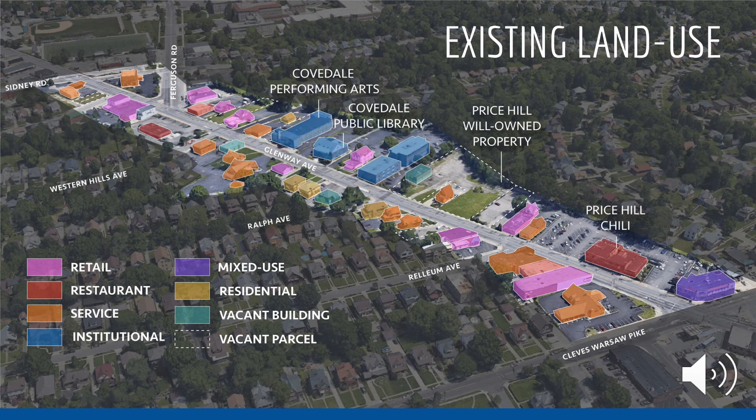The farther one travels west away from Cincinnati on Glenway, the more auto-oriented the urban environment becomes. The automobile has dramatically impacted Glenway's form and function.

The over-reliance on cars has negatively impacted neighborhood business districts in three ways. They have decreased the walkability of urban commercial corridors, resulting in fewer pedestrians and less time for passersby to take notice of their surroundings. Furthermore, pedestrians are currently forced to walk alongside the busy thoroughfare, making it dangerous and decreasing the total number of pedestrians walking throughout the district.

Second, they have greedily consumed the majority of the right-of-way to cars, seen in the 4 lanes of traffic currently allowed for vehicles, making alternate modes of transportation non-existent.

Finally, parking has been so prioritized that it has manifested into front parking lots, creating a physical barrier between pedestrians on the sidewalk and the buildings.

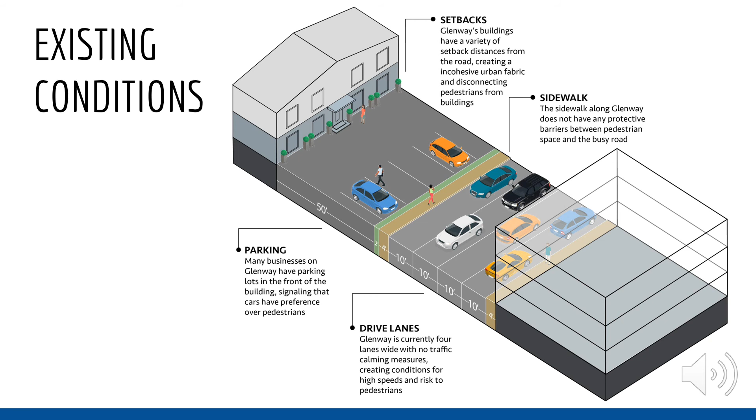The nature of how we produce and consume is changing, and therefore the nature of work is beginning to evolve as well. Retail storefronts have been declining since the Great Recession, and Cincinnati's neighborhood business districts, including those in Price Hill, have experienced this firsthand.

The fallout has resulted in an onslaught of lifeless streets and vacant storefronts. The overprescription of retail as the predominant use for commercial areas has led districts like Glenway into an unsustainable cycle that negatively affects the greater community's quality of life, efficacy, and self-esteem.

Therefore, exploring how non-retail uses can spur neighborhood vibrancy and activity must be explored in order to set neighborhood business districts up for success in the future.

A healthy street is one where there is trust between buildings, users, and pedestrians. Active storefronts can help sidewalks build trust, build life, and build community. But the question is, if you're not buying and selling in a storefront, what can it be used for?

First, storefronts can act as community spaces where people can gather and interact. Second, storefronts can become a place for creation instead of consumption. Third, storefronts can still be places where people look, watch, and explore. And finally, storefronts can change. Sometimes the best use for a community requires the creation of a new space.

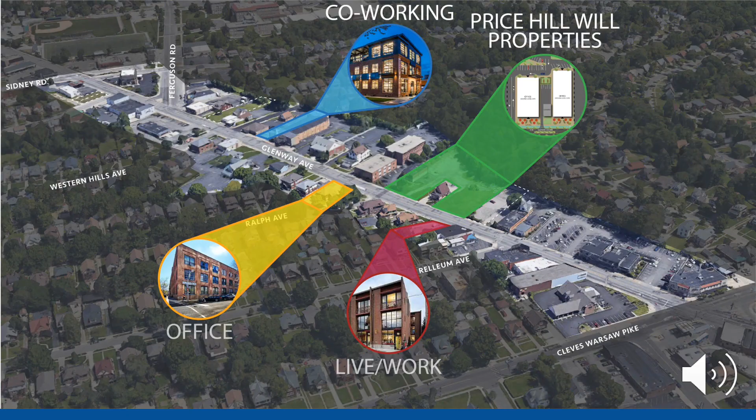Although Glenway Avenue has its challenges, it also contains many small businesses that are vitally important to the neighborhood. For this reason, this plan only focuses on the vacant parcels and buildings along Glenway. Infill development of office, co-working, and live-work buildings will help restitch the area's urban fabric back together and bring foot traffic to the street.

Price Hill Will, the neighborhood's community development corporation and project partner, owns several parcels of land along Glenway, shown in green. This land is currently vacant, and its development will be an important catalyst to rebrand Glenway as a work district.

Cincinnati's downtown office space is currently in decline. As businesses adapt to economic and technological changes, the nature of employment and work is evolving as well. While empty downtown office buildings are being converted into residential units, some urban neighborhoods are conversely retrofitting former industrial, retail, and residential units into office space to absorb the displaced office tenants from downtown.

Creating traditional office space in urban neighborhoods allows for tenants to remain in the city and continue having access to urban amenities, pay cheaper rent, while reaching an underserved small tenant office market. As smaller startups continue to grow, they become large enough to need private office space. However, they aren't large enough to afford or sustain traditional downtown spaces. Therefore, urban spaces like along Glenway are prime neighborhoods to fill this market void.

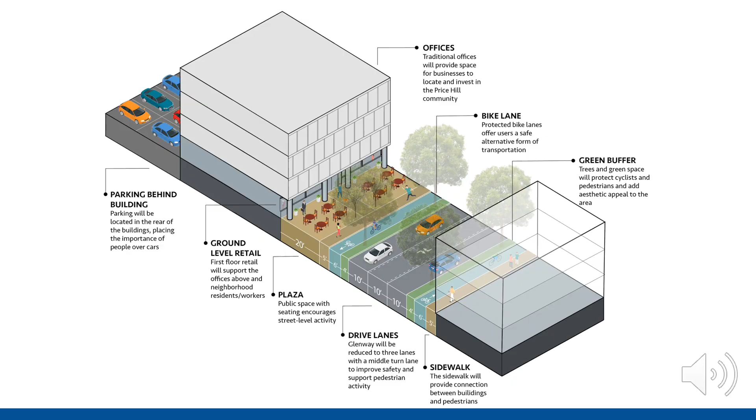This illustrates what a 4-story urban office would look like on Glenway across from the Talbert House, currently occupied by a vacant business. This stretch of Glenway is comprised of residential homes, some of which have been converted into service retailers. This stretch of buildings has unusually large setbacks from the road, and some have placed parking in the front of the buildings, creating a barrier between pedestrians and the structure.

Notice how the new plaza runs right from the building up to the sidewalk compared to the buildings in the background. This helps passers-by see how the space is being used. The added street trees along Glenway provide an aesthetic appeal as well as shade for those enjoying the plaza. Additionally, the ground level windows help communicate how the space is being activated internally to those along the street.

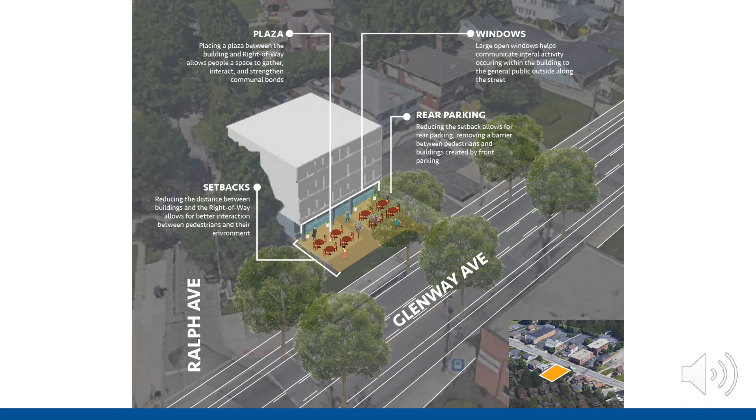A key component of making Glenway work are the site plan scenarios on Price Hill Will's properties between Price Hill Chili and the Talbert House for each of the working spaces. The development of the area offers Glenway a chance to connect several of its anchors, which are now separated by expansive empty lots.

Each site plan operates around the dentist's office located in the middle of the site. Price Hill Will's property can adequately accommodate urban office buildings. Since the dentist's office sits in the middle of the site, 2 office buildings are recommended, 1 on each side. The site plan calls for parking to be placed behind the buildings so that the front plazas can adjoin the sidewalk. The ground level retail spaces are recommended for a cafe, gym, or other service, allowing for different amenities to be provided to the neighborhood.

Co-working spaces are becoming increasingly popular in Cincinnati and throughout the country. They provide users with shared and private workspaces, office equipment, and amenities for a monthly or yearly fee. Co-working offices serve a wide range of users, including startups, freelancers, and telecommuters. As an increasing amount of work in many industries is able to be done remotely, workers will look for productive environments to operate in. As we are currently seeing, working from home is often not ideal.

Co-working spaces give people the freedom to work independently or collaboratively with other creatives. Glenway Avenue and the Price Hill community could benefit from offices that offer this flexibility. Co-working spaces attract creatives and innovators, so equipping the space with features like decks, outdoor workspaces, and green roofs would be an attraction to both the building and the district.

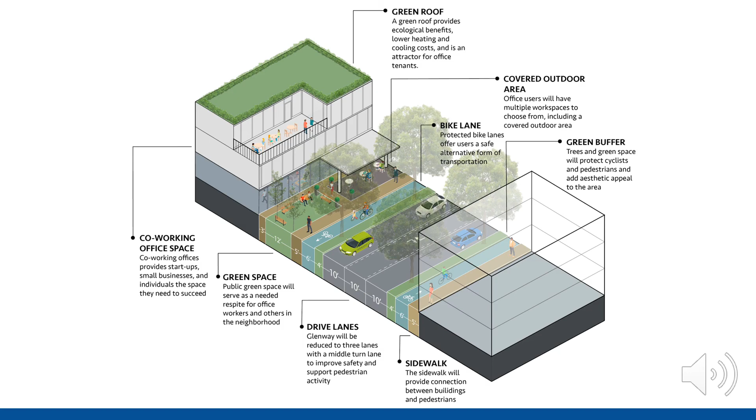Here you can see what a co-working space could look like on Glenway Avenue. Instead of an empty parcel separating the Performing Arts Center and the dental practice, an active use is introduced to the space, helping to build a complete street wall of buildings. This gives the sidewalk a sense of enclosure and encourages pedestrian activity. Parking is relocated to the rear of the building, prioritizing people's movement over cars while still providing for drivers.

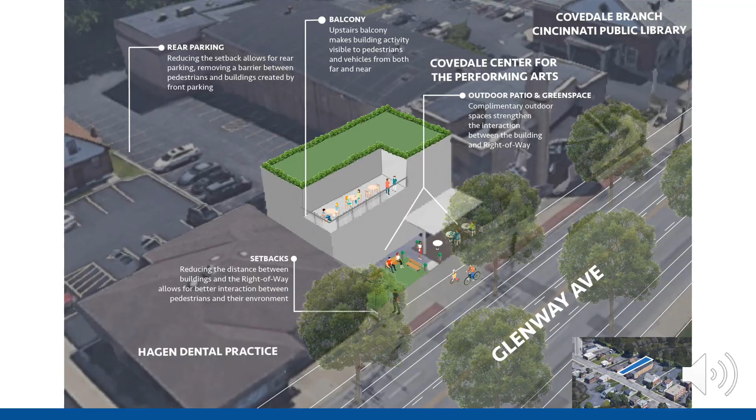Price Hill Will's property is a perfect site for a co-working development. Because of the dentist's office in the center of the properties, 2 office buildings would be most appropriate. Ground level retail uses such as a cafe or fitness center could serve the office users as well as the neighborhood residents and visitors. Outdoor areas in front of the buildings could be used as additional workspace for the tenants or for public seating for retail uses. All parking would be located in the rear of the building to prioritize pedestrians and public interaction at the street and sidewalk level.

Live workspaces are slowly becoming more popular throughout America. This arrangement allows for an individual to permanently reside where they also work. Live workspaces are great for small businesses that aren't over-reliant on retail in their business model. These types of businesses have multiple channels for engaging with customers and commerce. With the internet, small businesses have more access to a wider audience than in the past. Instead of having two rents or mortgages, live workspaces allow entrepreneurs to conveniently combine these two expenses.

Live workspace helps attract activity to neighborhood business districts by offering 24/7 activity into the space, whether it be for business or personal activities. Having tenants live and work in the same area also helps the community grow tighter by allowing more opportunities for existing residents to meet with tenants.

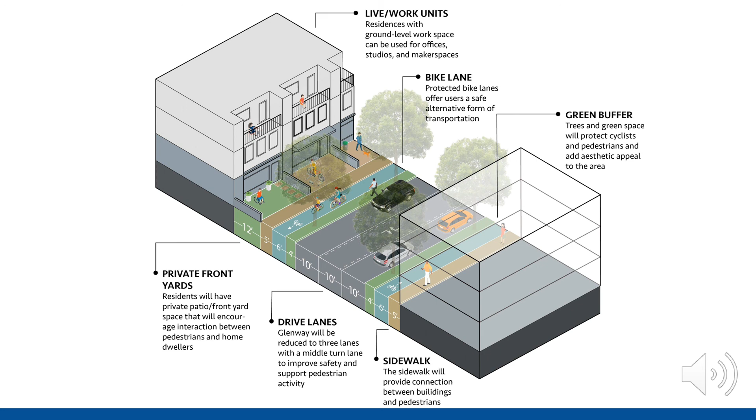The Live Work street design for Glenway Avenue allows for pedestrians on the sidewalk to easily enter, view, and engage with owners and patrons.

Here, live work units are depicted on Glenway along the stretch of road that houses many residential buildings. The duality of live work units allows for the building to seamlessly blend into the current urban fabric while overcoming immediate challenges like large setbacks. Eliminating the setbacks and replacing them with front yards, workspaces, or patios better utilizes the space between buildings and the right of way. Additionally, balconies communicate activity and energy to vehicles and pedestrians from both far and near.

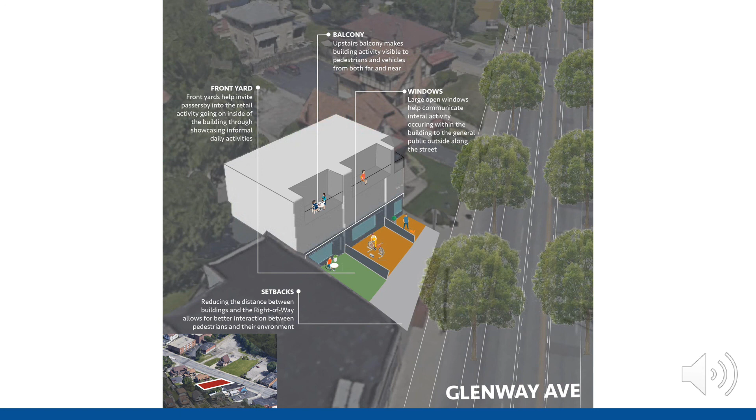Finally, having large windows on the ground level lets the public see what is occurring inside the building, whether it be business or personal activities.

The Live Work site plan for the Price Hill Will properties allows for up to 6 units. The units match the dentist's office in the middle and let tenants utilize front yards to strengthen the bond between the building and the street.

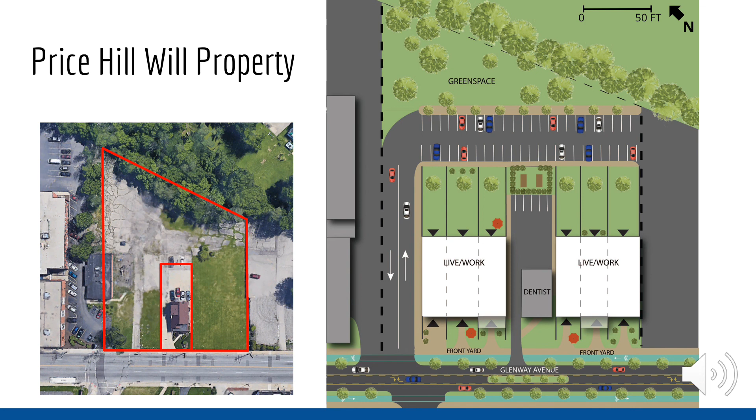The live work units also have spacious private backyards that aren't always easy to find in urban settings. Like the previous scenarios, parking is moved to the back of the buildings, with a green space occupying the very back of the lot. Alternate designs could provide for additional units with smaller yards and community green space.

Financing the redesign of Glenway Avenue and infill development projects is a challenge of this district plan. Fortunately, there are sources of funding available to the community. Grant programs such as the City of Cincinnati's Neighborhood Business District Improvement Program and the Ohio Department of Transportation's Safe Routes to School program offer grant funding to improve streets and sidewalks. Duke Energy's Urban Revitalization Initiative also offers grant funding to redevelopment projects that aim to stimulate growth, job creation, and further investments in Cincinnati's urban core.

Infill development projects will be driven by private developers with Price Hill Will as a potential partner. A successful office project on the Price Hill Will property will demonstrate the market need for office buildings. Market data supports this need as 63% of the employment in the area is considered white collar. Private development may also be able to utilize the West Price Hill Tax Increment Financing District, which this stretch of Glenway is a part of. All new construction should opt into the city's TIF district as well so the fund can gain more revenue over time. For decades, West Price Hill's Glenway Neighborhood Business District has been dealt a losing hand by focusing its economic revitalization and future solely on retail.

Through exploring non-retail uses that revolve around the work scenarios presented in the Making Glenway Work plan, this district has the opportunity to set itself up for future changes in how people travel, work, and engage with the city. Establishing Glenway Avenue as a work district will help West Price Hill improve its street design, urban character, and vacant areas, while creating a sustainable district identity.